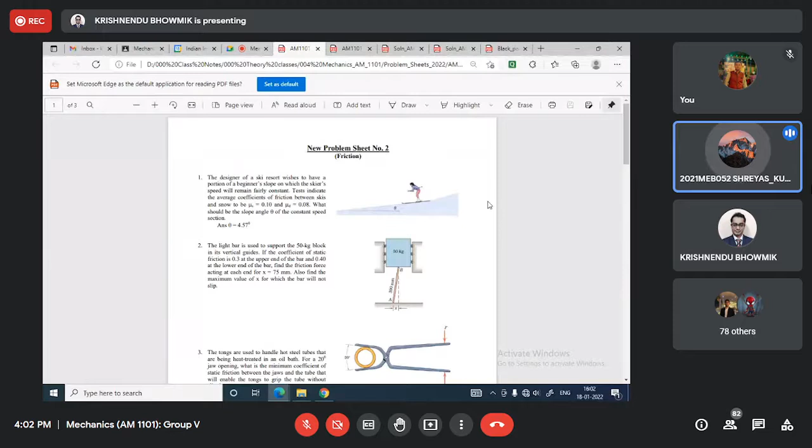Sir, can I make a small suggestion? There is an extension in Google Chrome where you click once and get all the attendance in an Excel sheet, so you can use that, it saves a lot of time. But that will not help me know whether students entered late or before. Actually sir, you can take it in the middle of class so you know everyone is present, and you don't disclose to us when you are taking it.

No, that is the issue. Actually, why I'm doing this, I told you before. A recent incident happened - one teacher took attendance entirely through Google Form, and somehow it got missed. One student was supposed to have almost 100% attendance, but he was not able to appear in the exam because, as per the professor's notifications, he was not at all in the class.

That's why I always prefer to interact with you. Let's take some 5-10 minutes, but at least there will be some interaction. I should not be a robot in taking attendance, that is the main purpose, understood?

Okay sir, don't worry. What else - some students, there will be no interaction with me at all, some students are not like in the aerospace department or mechanical engineering, to whom I can take class in the near future. So if one student is a shy person and not asking any questions, and I'm not taking attendance, that means verbally I never call your name or roll number and you have given an answer, then we are all just like Sophia, a robot.

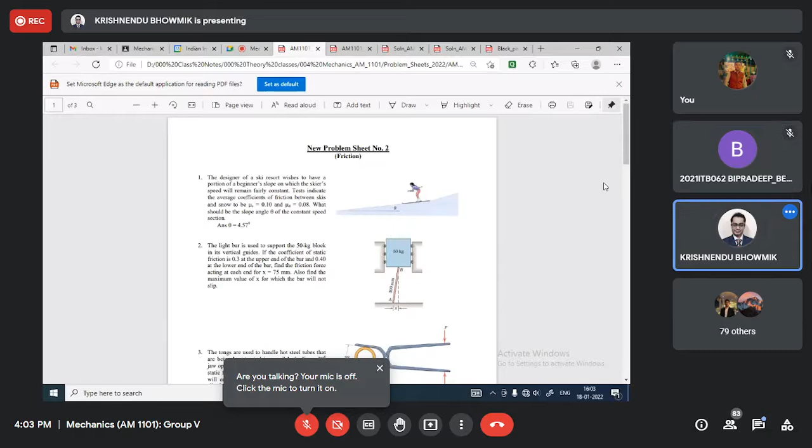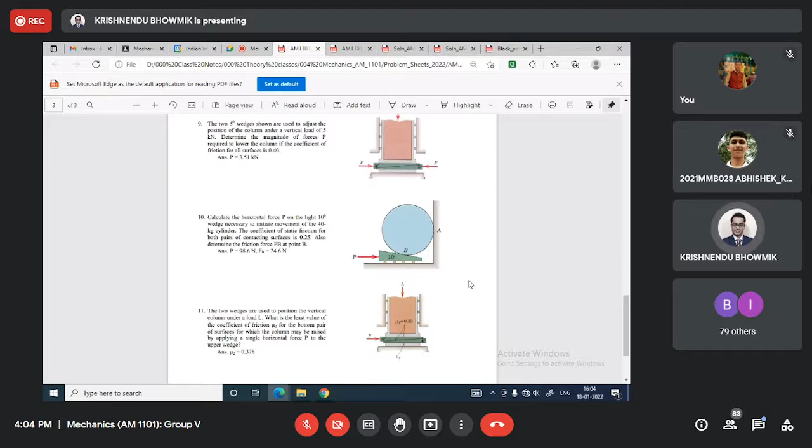Problem 7, problem 10. Have I told about that day or not? Did I tell this before? No, okay no problem. Any other problems? Actually, I will tell you, if you have any problem for friction, you have to tell me now itself, not after. I will see how many problems you are having. If there are many more, I will think not all problems I will solve. Few problems I will solve.

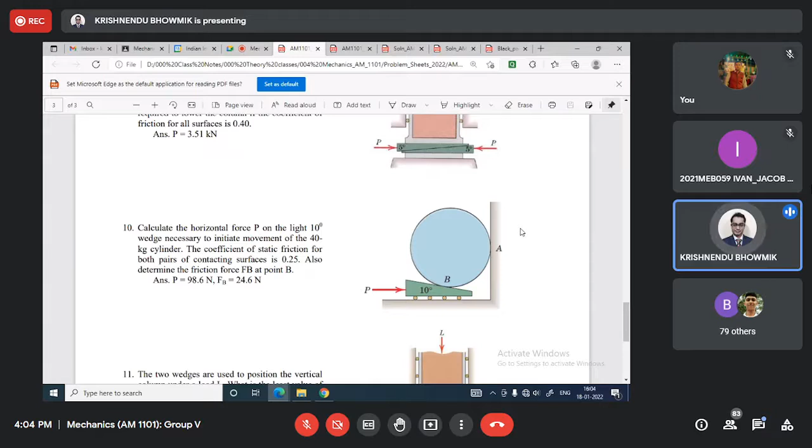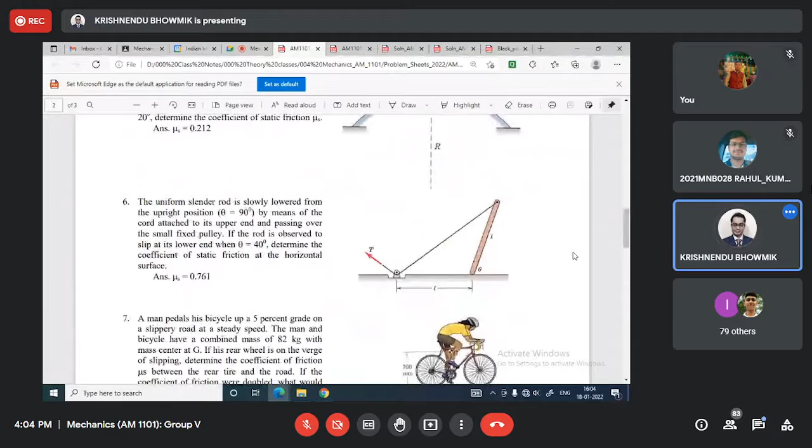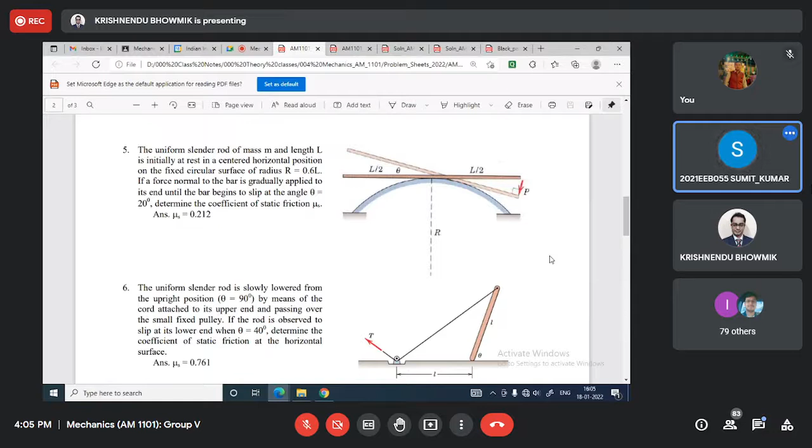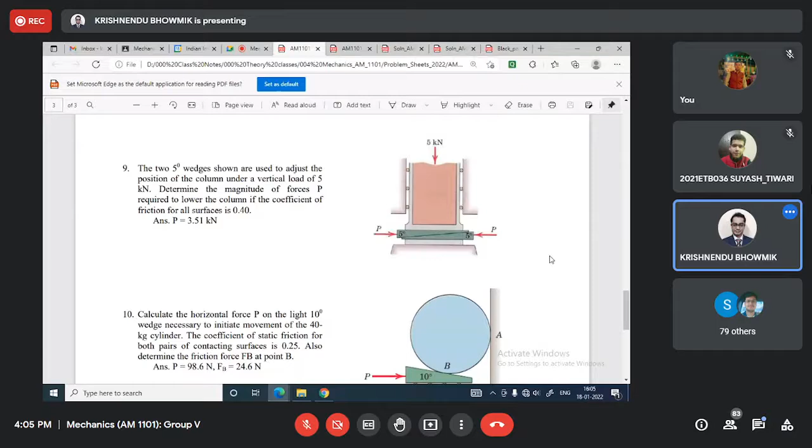One problem, one request I got: problem number 7. Another request, problem 10. Any other problems? You have to tell now itself. Sir, question number 6. Okay, any other problem? Actually sir, I have not completed it, that's why I have no doubt in it. Okay, so problem number 9, sir. Okay, anything else? That's all, correct?

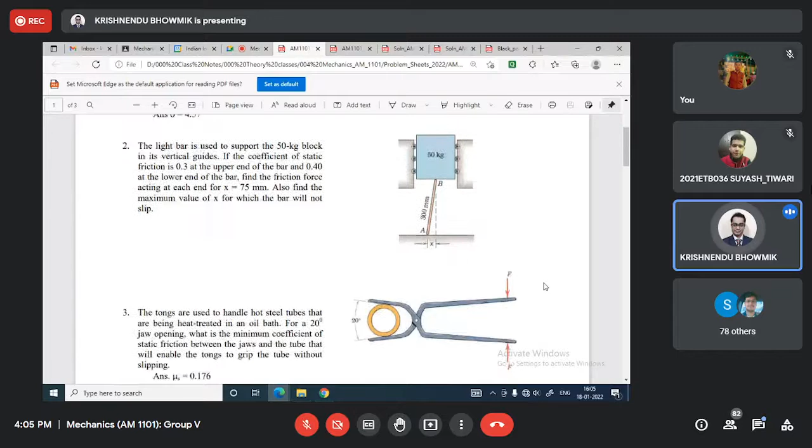If anybody wants to say this, you have to say now itself, because next day I will not give you any hints from this. This is friction, I will not ask next day. Whatever you want to tell, tell now itself. If anybody has any doubt regarding any free body diagram, anything, you can ask me now.

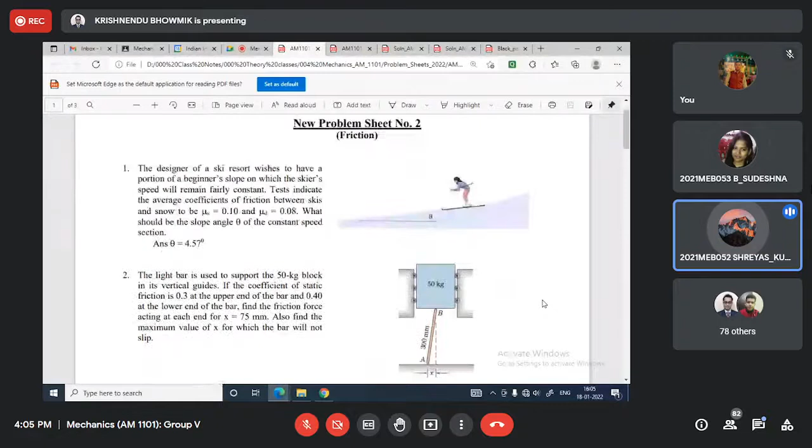Sir, can we keep this for next class because many of us haven't tried the sheet yet? I tell you, last day I showed 2 or 3 problems, now I am showing you 4. 3 plus 4 is 7, remaining 5. So next day, if some students are asking for 5 more problems, what does it mean? You are 10 plus 2 standard, you have qualified, you cracked JEE main, you have come here. Out of 12, am I solving all 12? It is not good, correct?

That's why I'm telling, if anybody is facing any issue, some of your friends have already solved it. You can take help from them, but don't copy their answer script. You can discuss and take help and do it on your own. You understand these problems. Last day maybe I solved 3, today I am solving 4, so 3 plus 4 is 7.

Say for example, next day some students will be asking the remaining 5 problems, that means all 12 problems I am solving here. That is not good. If it continues that way, you will not get any confidence, and when I give any new problems, you will not be able to answer correctly. You will not be able to solve that. Don't memorize the problem, don't just try to memorize everything. Try to understand the concept. Utilize the concept, 100% you will get the results.

Now tell me, one, two, three, four problems - request I got. Any other problems if you have, you can tell me.

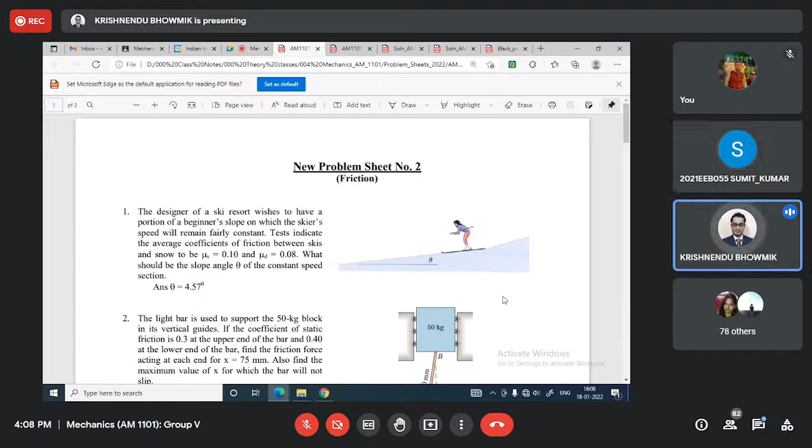No, don't waste time, don't waste time. Not required, only FBDs. That is more than enough because FBD represents everything. Don't worry. Okay sir, I have joined late.

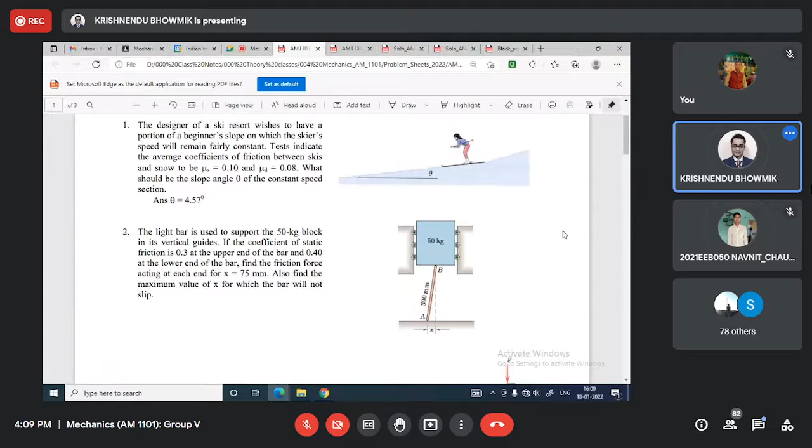Should I continue with these four problems? Yes, sir. Okay, just a minute. Let me check problem 6 first. Which one is 6? This one. Okay, let me check it.

We have a uniform slender rod that is slowly lowered from the upright position. Initially it was like that, theta was 90 degrees, this was theta. Now we are slowly lowering that by means of a cord attached to its upper end here, passing over a small fixed pulley.

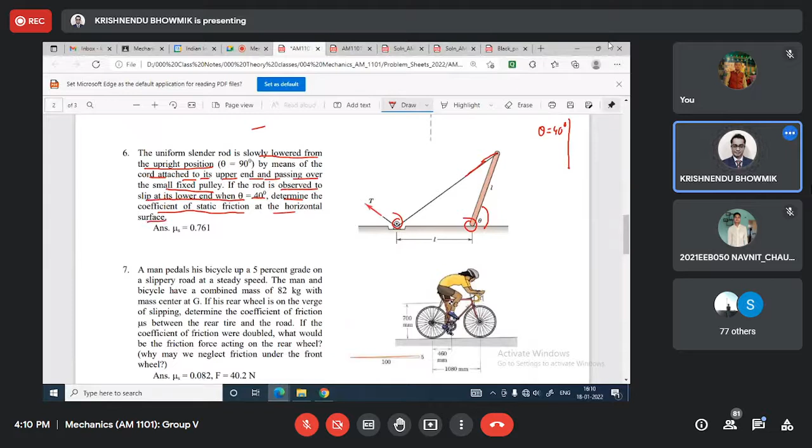The rod is observed to slip at the lower end. Here, slipping will occur at theta equal to 40 degrees. Determine the coefficient of static friction at the horizontal surface. Since this is a pulley, we can consider it frictionless, so the only friction is here.

Now you have to draw the free body diagram. So draw the free body diagram. The imaginary closed boundary is like this. So what are the things we are expecting?

First of all, if theta becomes 40 degrees from 90 degrees, you have reached 40 degrees, but because you are lowering this, if you go further it will start slipping. So try to understand which side it will move, left or right. That's what you have to consider first.

So, this one, will it try to move left or right? Left, sir. Okay, initially it was like this. Now you are lowering this, maybe this. Then will it try to move left or right? Left, sir. That means the friction force will act in this direction.

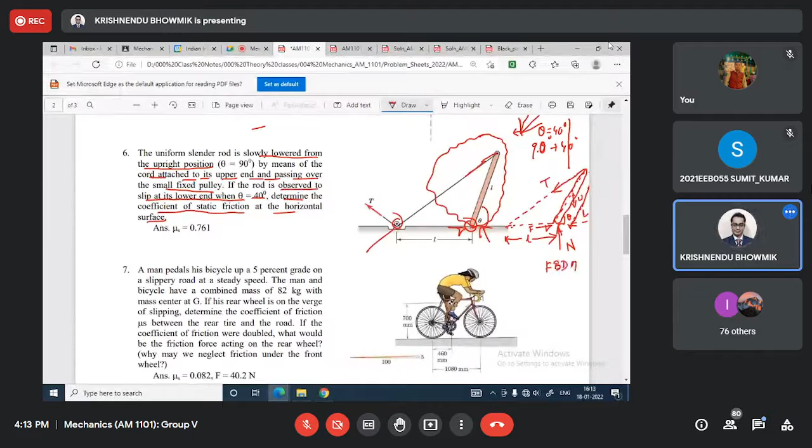Slender rod. Then I will write x-axis here, y-axis here. Okay. Now if this is L, this is L, this also L.

So if it is alpha, this also will be alpha, correct? Yes, sir, if that is alpha, that also will be alpha. If it is 40 degrees, then it is 180 minus 40, correct? Yes, sir. Or maybe 2 alpha equal to theta, is it not? Alpha plus alpha equal to theta, so 2 alpha equal to theta. You can calculate the alpha value.

So alpha you know. Now you draw to understand this free body diagram, so unknowns are okay. Now the question is that it is observed when theta equal to 40 degrees, it will start slipping. That means this F, the friction force F equal to mu S n, has reached the limiting case. F equal to F limiting when theta equal to 40 degrees. Now if somebody wants to calculate the unknowns, that means F equal to mu S n.

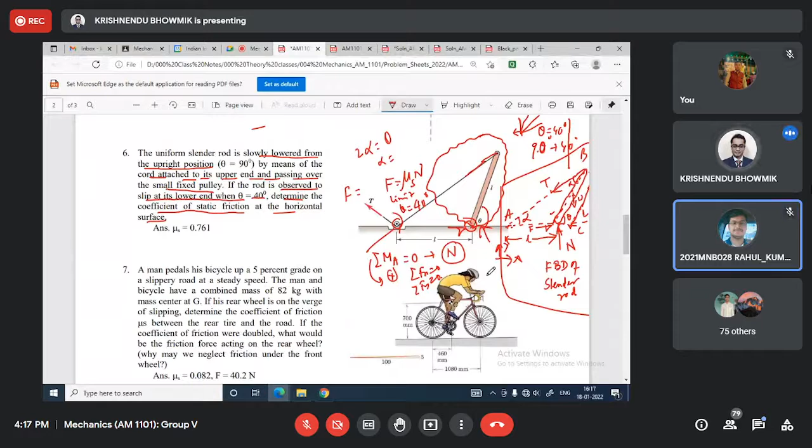Okay, this is done. Any doubts on these questions? No sir. Yes, question 6 is done. Next is 7. Yes, 7 is this one.

Here a man pedals his bicycle up, meaning moving up basically.

The bicycle moves up a 5 percent grade on a slippery road at a steady speed. Steady speed means acceleration is 0.

The man and bicycle have a combined mass of 82 kg, and the mass center is G.

So this is G, the mass center here. This is the mass center G.

If the rear wheel is on the verge of slipping, determine the coefficient of friction mu s between the rear tire and the road. If the coefficient of friction were doubled, what should be the friction force acting on the rear wheel?

Why may we neglect friction on the front wheel? This is the total question.

Now the idea is you have to draw the free body diagram carefully for these problems. To draw the free body diagram, you can see here this is 5, this is 100.

So 5 by 100, if the angle is alpha here, then tan alpha equals 5 by 100. Now I am going to draw this free body diagram.

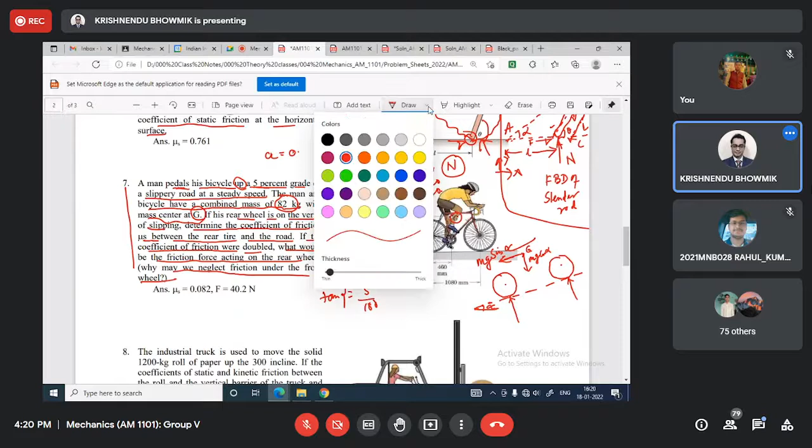Now, as it is moving up, okay, it is at steady speed.

Okay, it is moving with steady speed. Here mg is for 82 kg.

Sir, 82g, sorry, multiplied. Thank you. In Newtons. So okay, what else is there? Let me check, nothing.

The total weight has been given. Let me draw the distances now.

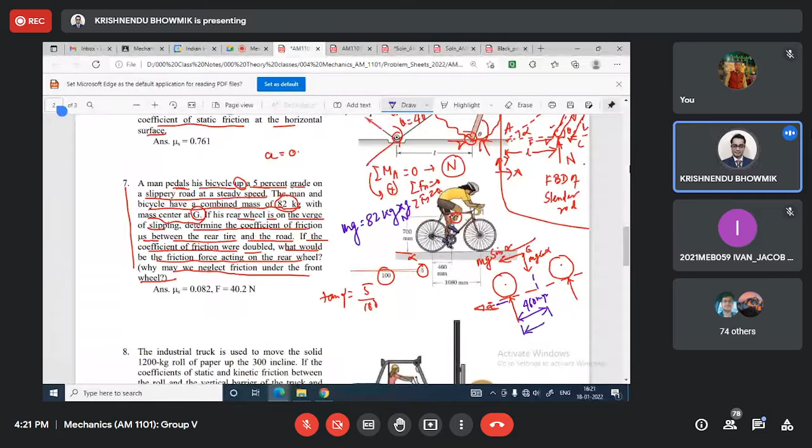This is 460 millimeters, this is 1080 millimeters.

This distance is given as 700 millimeters.

So maybe this is the x direction, this is the y direction. Now basically this is maybe N1 normal reaction, then this is N2. So N1, N2, two reaction forces.

Here is self weight mg, three unknowns. Okay, now the friction force, which direction is the friction force supposed to act?

Right, upward sir. Yes, because that friction force is helping it move up, moving up. Very good. Now maybe friction force F1.

Now if you see carefully, this N1 and N2 - if somebody calculates N1 and N2, N1 is higher than N2.

Sir, friction will be on both tires, right? I'll tell you, if I take friction on both sides, it will become indeterminate, you cannot calculate it.

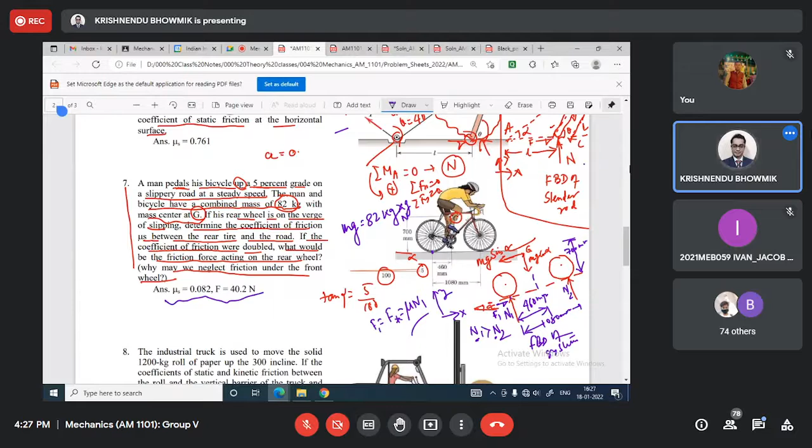Okay, very old solutions, don't worry. So this is the free body diagram, so this is friction, this and this. So here the notation is, say this is A, this point is B, and this is G given.

And dimensions are given, X, Y you have considered, and 5 by 100 inclination is theta or alpha, theta equal to 2.86 degrees. You can calculate. We have 1, 2, 3.

Actually these are dependent, 1, 2, 3. If I consider another friction here, it will be an indeterminate problem, a redundant problem. So we are not considering friction here. Another reason is it has already started slipping because N1 is greater than N2.

I'll show you. So to solve this problem, say if I take moment with respect to this point A, then I can calculate N1, because in your problem mass is given as 82 kg.

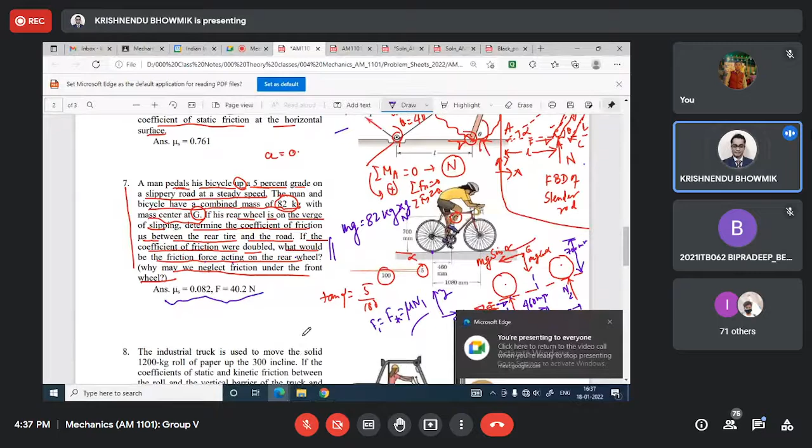Next was, this is 7, correct? 9, this one is yes. Okay, there 9, then 10. Okay, fine, 2 problems more.

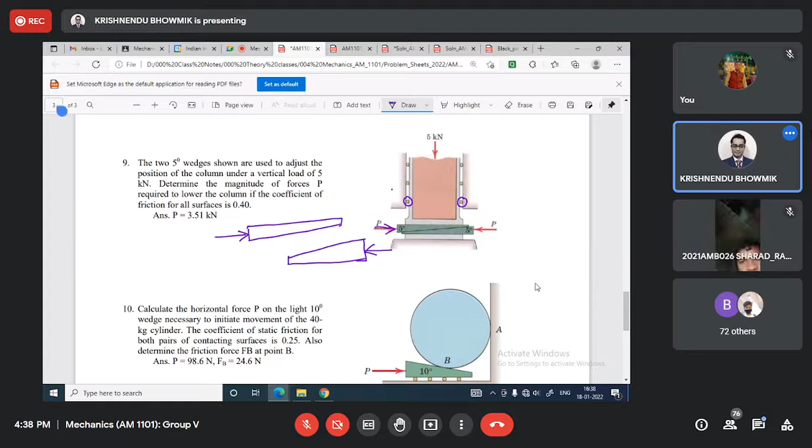Okay, so we have 2 wedges. Sorry, 2 wedges, like one is like this, one is like this. Okay, I have done this. Then some force has been applied from there. So one question is, if you apply force here, like this and this, which case, left case 1, case 2, left, right, which portions will be in contact? Left or right? Roller, right, right portion, right due to one, this, yes, yes, due to the roller, yes, yes, correct. Friction can be neglected from the roller. Friction can be neglected from the roller.

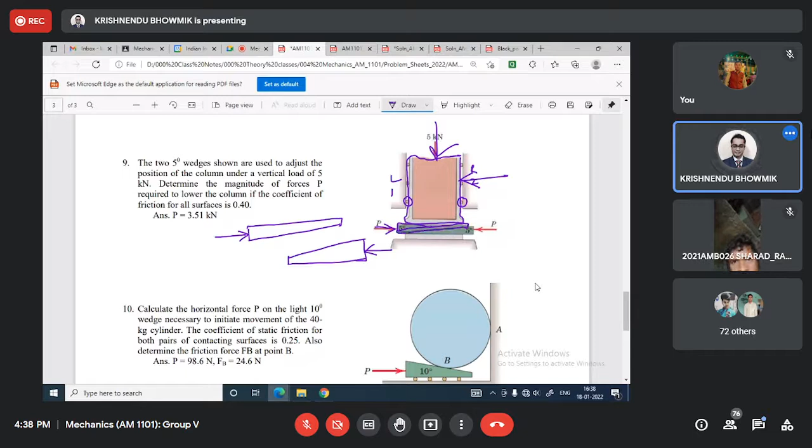So one case is, say, I can have, I'm drawing here itself because to save some time. I'll show you the solution again. So first free body diagram is like this. Entire things I am considering, okay? Only these upper portions. Then this is the vertical one, this is the normal one, sorry, this is the normal one. So there will be some reaction force, normal reaction, and coefficient of friction, it will be here, left side or right side.

Friction force, you are not understanding. Here, let me draw like this. Right side, yes. Right to left or left to right? Right to left. Okay, this.

So that free body diagram, if you draw, then you can get some relationship from the top one. From the bottom one also you can get some relationship. But if we apply P in this direction, this 5 kN block will try to move in the upward direction.

But in this problem it is given: determine the magnitude of force required to lower the column, if the coefficient of friction in all cases is 0.4. That means if we want to lower down this column, then the force has to be applied in the reverse direction. Then only you will be able to lower it down.

So two problems have been marked here: one is to lift it up, and one is to keep it down. Although the figure has been given, if you work accordingly, it will try to keep it moving upward. If you make P in the reverse direction, as I told, initially it was given this way, it will lift up. To use this, it will lower down, it will move down.

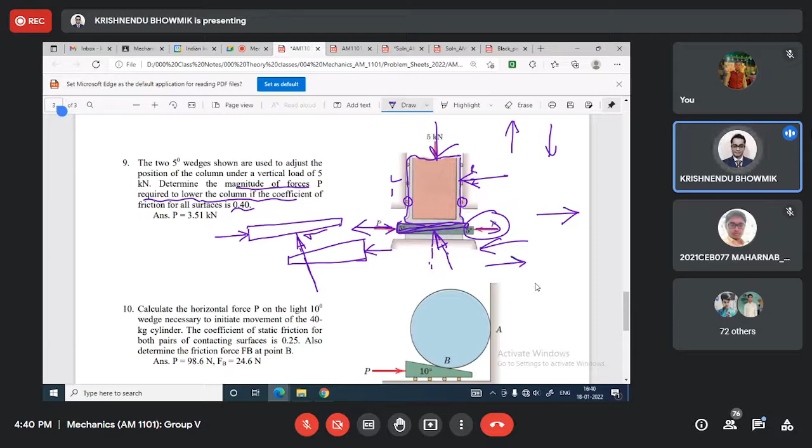So to get the solution, what we can do? What is the problem number? It is 9, correct? Okay.

So as I told, for the left side one, as a whole, I want to draw this entire thing. This is the reaction force, say R4. This is the self weight, 5 kilonewton. This is P, initially given P.

Basically here, try to understand: this is the normal direction, and this is the friction direction, normal direction reaction and friction. As a whole, it will have some resultant here. This is the resultant, I want to represent the resultant by R2. So this is the resultant, and this resultant will make an angle phi with the normal. Phi is the friction angle. So this is the normal, and this is phi.

And this is 5 degrees. So this is 5 degrees.

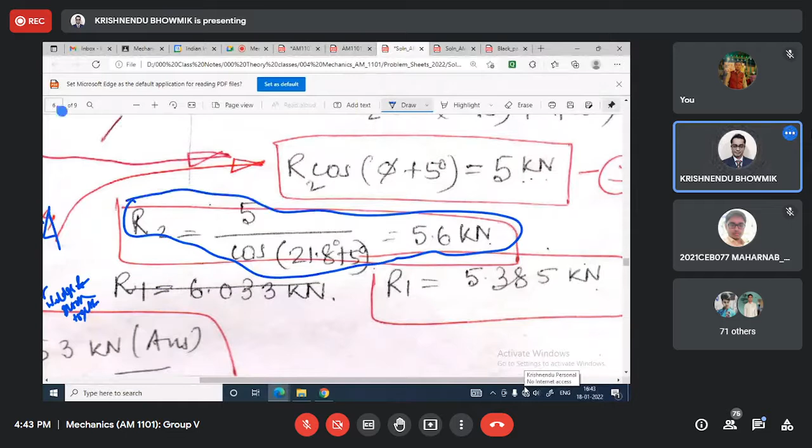R2 equal to, you can calculate, let me see, some value you can get: 5.6 kilonewton. This R2 you can calculate first from the free body diagram of this one.

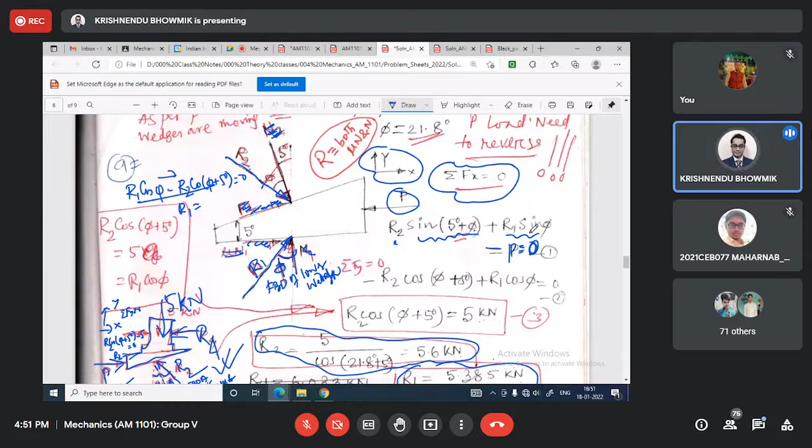Then come back to the free body diagram of these portions, so that R2 will be there. In the vertical direction, R2 cosine of 5 degree plus phi will be here, R1 cosine phi, vertical direction. In the horizontal direction, that is R2 sine of 5 degree plus phi, plus R1 sine phi, minus P equal to 0. You solve this, you will get R1, R2 and P values. This is case 1.

But you have to be careful what we are assuming: that both faces here and here we are using phi. Why are we using phi? You should write here: our assumption is that limiting friction will be reached at both the upper surface and lower surface of the lower block. That is the assumption we are doing. That's why we are utilizing this phi. Unless we do this, we cannot solve this problem, it will be indeterminate.

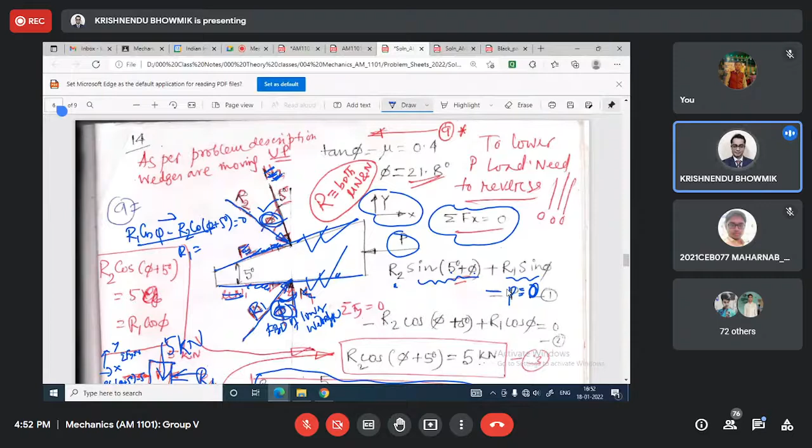So we are considering that for the lower wedge, both the upper surface and lower surface have reached the limiting friction case. That is the first assumption, I forgot to mention it initially. That's why this phi and this phi are valid for the expressions. Based on that, you can get this P value to lift it up. Then to lift it down, what do you have to consider? You have to reverse the direction of the force. If you do that, accordingly R1 and the friction force will start acting in the opposite direction.

Initially for this case it was right side directions, left to right, now it becomes right to left. It was inclined left to right, now it becomes inclined right to left. That's why this R2 and R1 direction has changed. What is R1 and R2? That is nothing but the resultant between the normal force and the friction force.

Now, very nicely you have to notice this R2 is making angle with the vertical, that is 21.8 degree minus 5 degree. Here it remains 5. Okay, summation Fy equal to 0, summation Fx equal to 0, solve it and you will get the correct answer.

Any doubt for this? Yeah students, any doubt? No sir. Okay, yes, then I can move to the last problem, 10. Which one is 10? Yes, let me check.

So calculate the horizontal force P on the light 10-degree wedge. Light means massless, this wedge. Necessary to initiate movement. It is trying to do the movement of the 40 kg cylinder, this 40 kg cylinder, huge weight compared with this wooden block, that's why we can neglect this.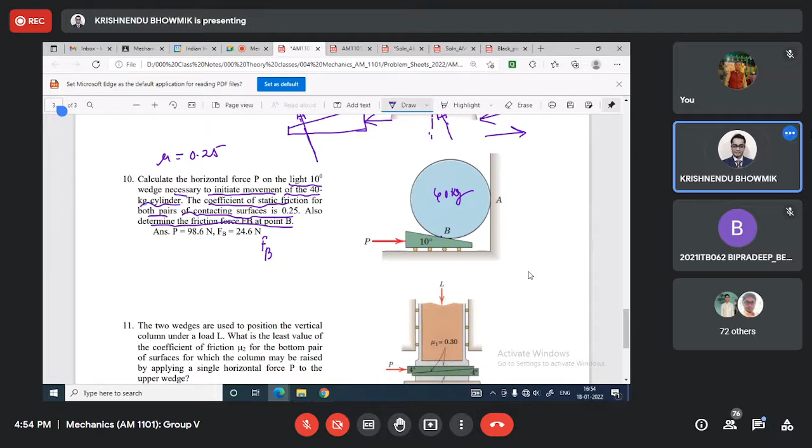So to solve this, one thing we can assume that there are two. If you draw a free body diagram of this, one is its self weight, let it be, one is its reaction force here, and during this contact, this is the normal, say NB, NA, this is mg. So I have not considered friction yet, I will consider here, wait.

Then for this case, see this is roller, we will not consider any friction there. Let it be only this. Then this is weightless, then this is the normal reactions NB, okay, this is P, this is say N AB, let's see NC. Okay, now friction force.

Here I have not considered the friction force. If I move these directions, this is the driving force. So here friction will be upward or downward along the incline? Downward? This one we are trying to move this, will it help you or resist it? Resist.

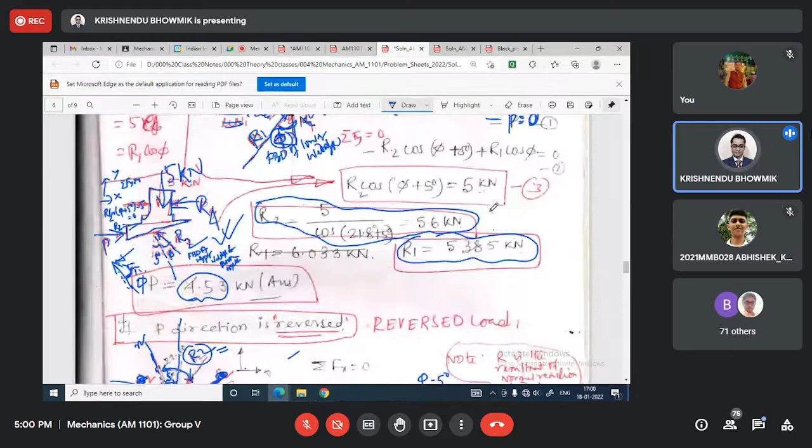FA equal to FB equal to this value. Okay, let's show you the solutions. This is 10, correct? Let me check. What is this? 9. Yes.

Okay, NB. So we can get FB equal to FA equal to mu Na. For FB I cannot use mu NB. This is A, okay, so FA equal to this is valid.

Now there are two free body diagrams here. This is one free body diagram, this is another, the free body diagram of this cylinder. FBD of wedge, FBD of cylinder. Do it carefully and you will get some relationship, like summation Fx equal to 0 will give some relationship, from which you can get some N1 value, some N2 value.

You can take this value also to get P, and solve it. Finally you will get P value as 98.6 newton. Now we will check whether you are correct or not.

So FB equal to mu NB. Actually it is B, okay. This is A, I think this is B. So this is zero. Mu is how much it is told? 0.25 multiplied by NB. Let me check A and B.

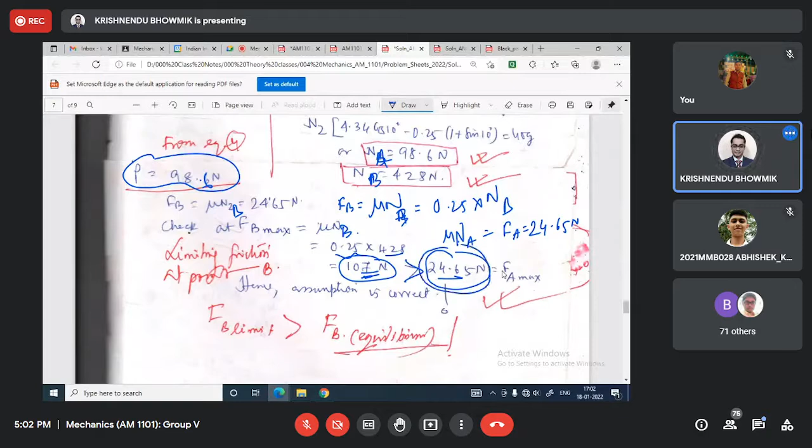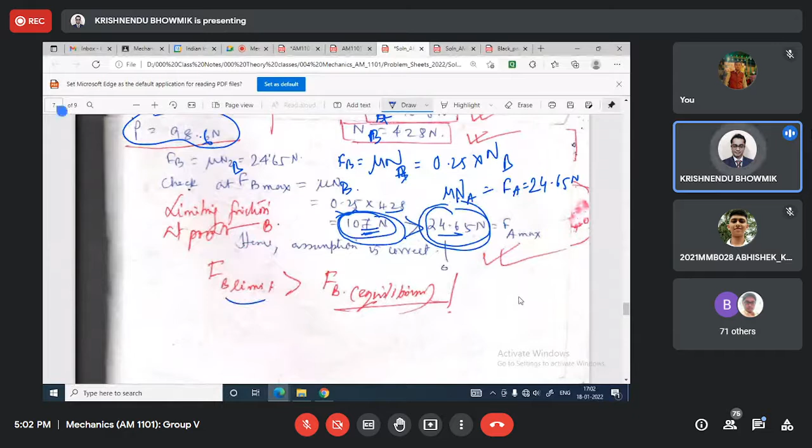That's why even if it starts slipping at A, B will not slip at point B, at the contact between this and this. So the B limit is higher than the equilibrium requirement. Hence our assumption is correct.

So you have to show this, show that the initial assumption is correct. If you are not showing this, then your answer is not correct, because it may happen that whatever you assumed is wrong, and then you have to consider the reverse — instead of slipping at A, it will start at B. But you have to be careful. When you have 4 or 5 surfaces in contact, you may reach wrong solutions. So try to understand some basics of mechanics to assume at which location the slipping is supposed to start.

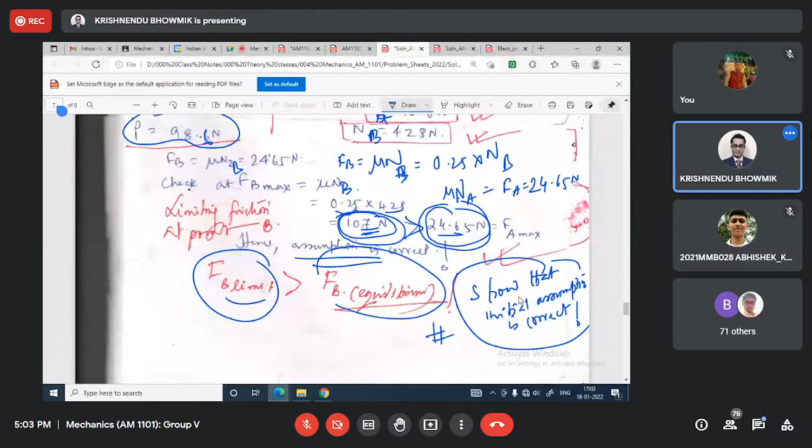Any problem up to this? No, sir. Okay, let me close this friction topic — no help, nothing more for the frictions.

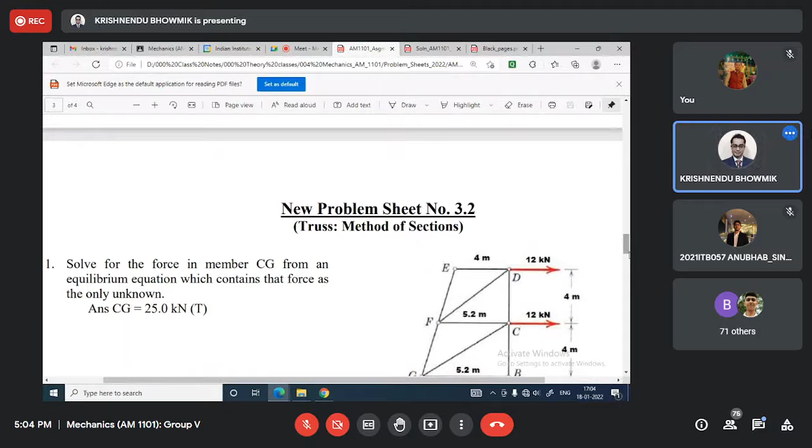Now for the truss problems, can you tell me some problems you are facing issues with? Let me write down whether I can solve them, I don't know, but at least I can note them down. Tell me, from 3.1, which one are you getting issues with?

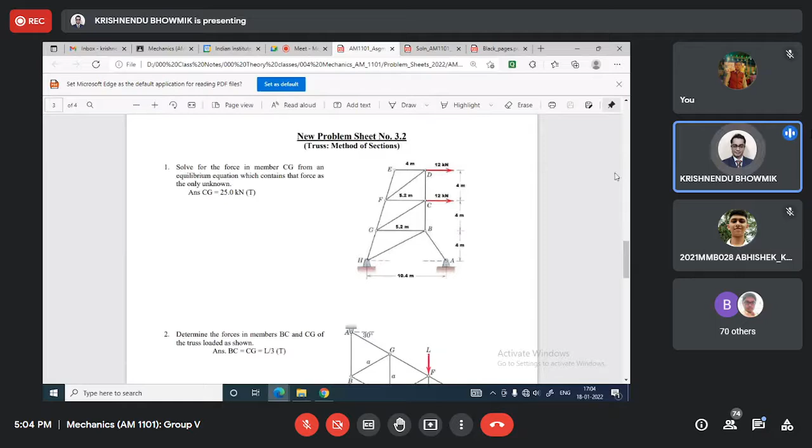One I have solved, correct? 3.1 and 3.2 — 3.1, this one I solved that day. And this also I have solved. 5 also I solved. Then this one, 3.21, I have solved. So 3 problems I have solved out of 14. Now tell me which one you need help with.

Or if you haven't had time till now, roughly tell me two problems I can solve — one from joints, the other from method of sections. You tell me. Next day also we'll do more, don't worry. So that day I showed you these problems.

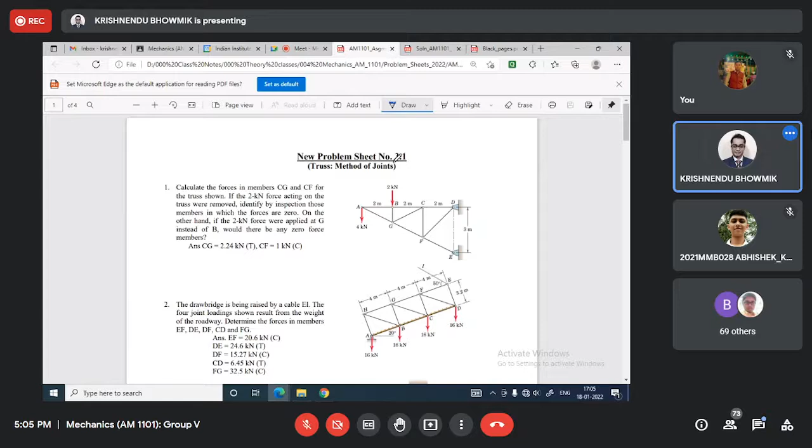On that day, these problems — wait, this one and this one, these two I have shown. Then I showed this one. These 3 problems. Now tell me any one problem from 3.1, any problem from 3.2.

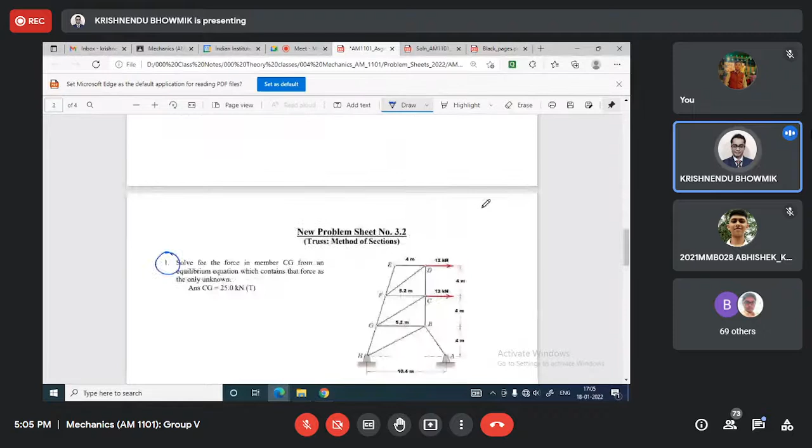Don't worry, next day also we'll continue this. 7, yeah 3.7, this one. Yes sir. Okay, 3.17. 3.17, okay. So 3.25, yes, 3.2 — this one, correct? Yes sir. Okay, 3.25, very good.

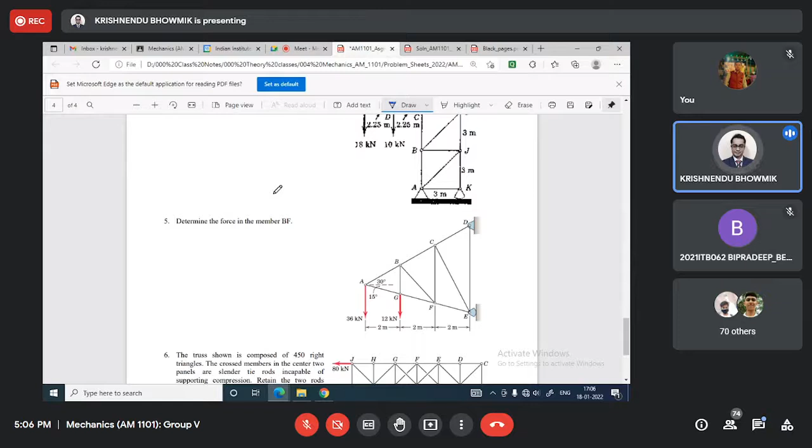So this is the tower for a transmission line. In electrical engineering you have seen this many times. It is modeled by the truss as shown in the figure. The cross member, there is some cross member here, this way the cross member, here one set, here one, here one.

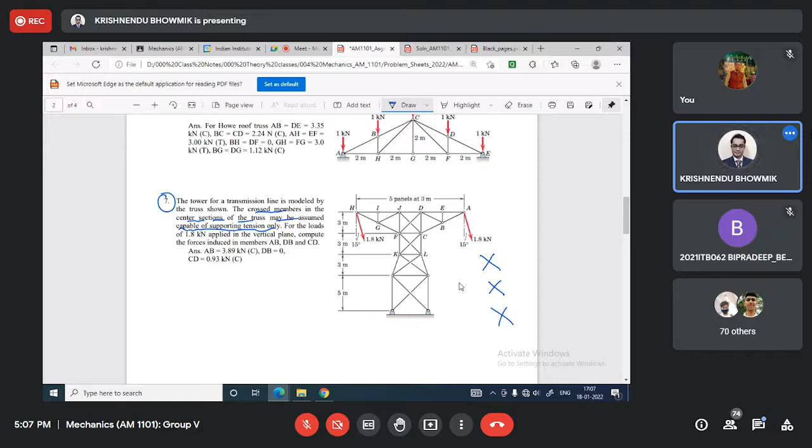The cross members in the center sections of the truss may be assumed capable of supporting tension only, so it will take only tension load, that is being told. So out of these two pair, only one member will take the load.

Why this assumption? If it is not given, we cannot determine this. It will be indeterminate. We cannot determine the unknown.

Next, for the loads of 1.8 kilonewton load applied in the vertical plane. This vertical plane means, you try to understand, this is X, this is Y, so this is Z, Z is perpendicular. This vertical plane means it is in the XY plane. So that means this vertical plane is indicating it is in the XY plane.

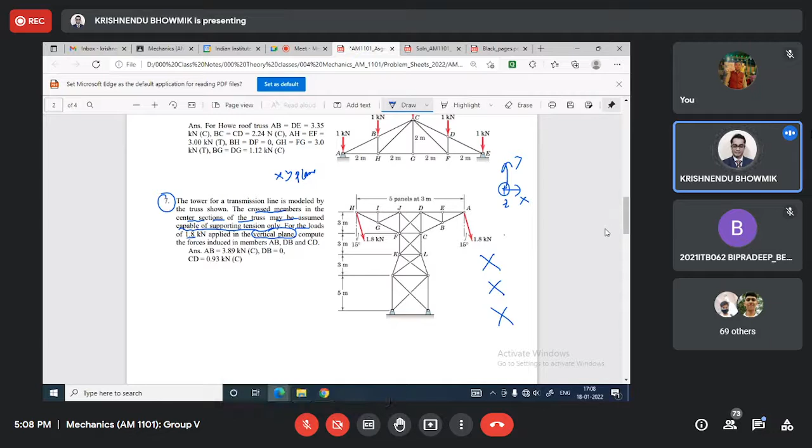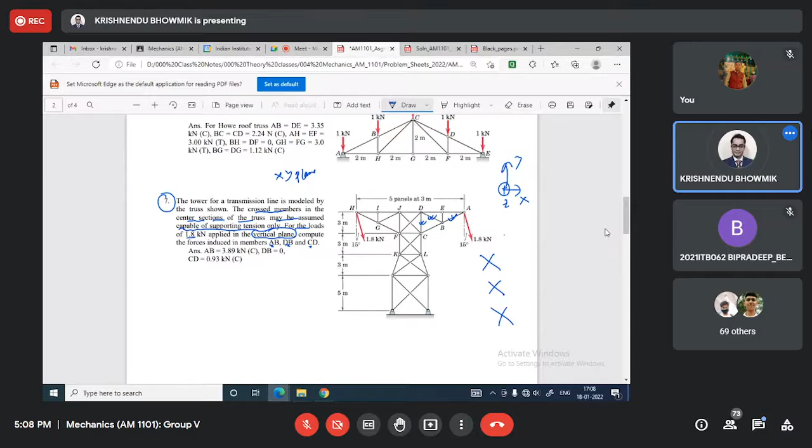Now compute the force induced in members AB, BD, CD. Which is AB? This member, then DB, this member, then CD, this member.

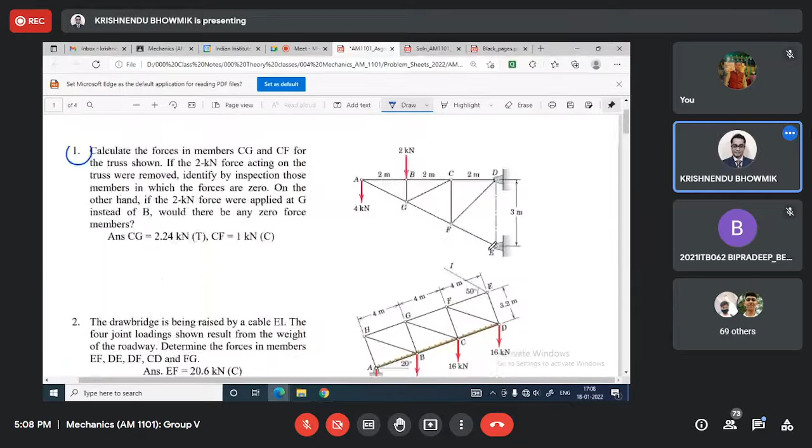Now you try to understand this problem. When load has not been applied, this is symmetric, is it not? When no load has been applied, it is symmetric. Which method is it? Let me check - method of joint. When no load has been applied, it is symmetric.

But the load is applied not in a symmetric way because it is having some inclination here. So symmetricity will be lost after the application of this 1.8 kilonewton load at some angle with the vertical, by 15 degrees. But initially the geometry was symmetric. It is very common, no?

You have seen many high tension wire connections of this type. Electrical engineers might be interested in that.

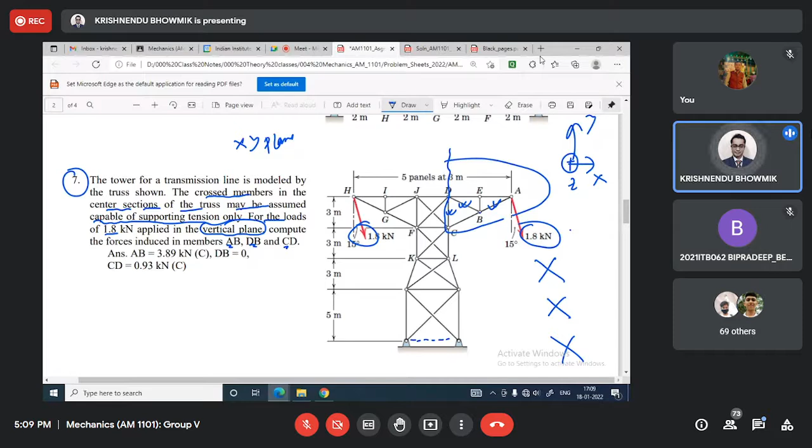So for this, as everything is shown on this side only, you can see this is not the complete truss - this member is missing. So internally it is not stable. But using two supports plus four supports, it is made stable. Because generally if we could have a triangular shape, any three supports are enough, correct? Here two supports, two reactions, here one reaction - you can see here it is a hinge. Extra support we have provided because externally we made this structure stable due to lack of this member.

Now don't worry, we don't need to take any reaction force, not required. Very careful observation for joint E. Joint E has members EA, ED, and EB. FBD of joint E: it will say in X and Y directions, summation Fy equal to 0 will ensure the EB value. EB value is 0 - that one you get first.

Then you draw the free body diagram of joint A. This is AB, AE, and this is the 1.8 kilonewton load, with angle theta equal to 15 degrees. FBD of joint A - as the method of joints says, all forces are passing through point A, it is concurrent, so the moment equilibrium equation is already satisfied.

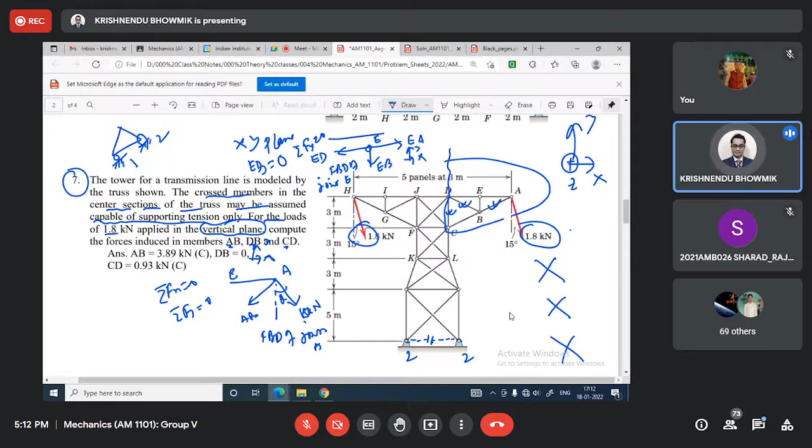Once AB is done, you draw the free body diagram of joint B - this is B, with members BC, AB, and BD. This one is already 0, correct, and this one is known. So you can calculate these unknowns.

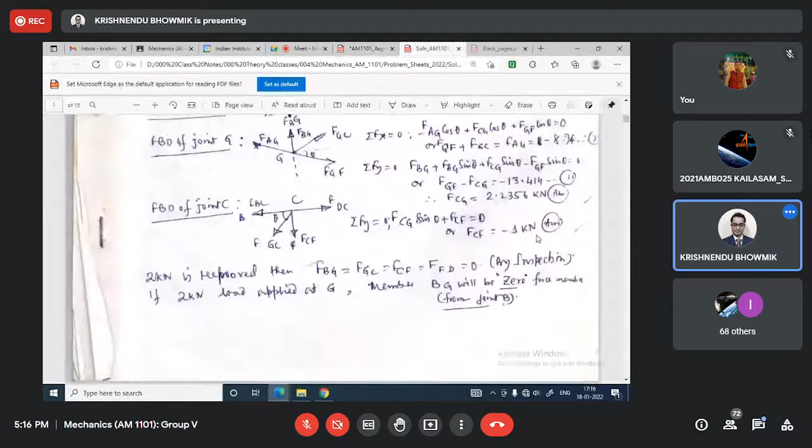Okay, let me see. Time is short, I can show you the solution for this. 3.1, we can have some inequality expressions for this.

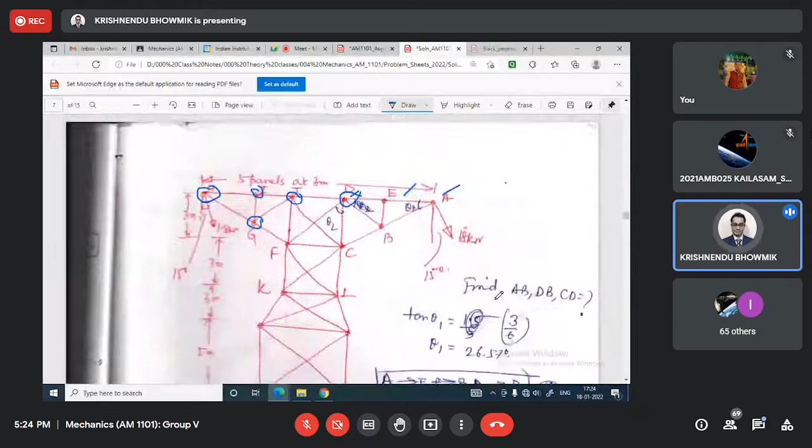What is the way I am showing you? This will be very lengthy, it is taking much time, but somebody can go step by step. Finally there will be some inequality expressions for this one and for this one. Considering DF as tensile, minimum value we can get, and considering CJ as tensile, minimum value we can get. Considering both as tensile, inequality will say that DJ is less than this and DJ is less than this.

Which one should I take? Less than this is less than, this is also less than equal to expression. So then we can consider some lower value of DJ. Then corresponding DF we can calculate, so remaining thing CD we can calculate accordingly. You follow this, and if you are facing any issue, next day we can see.

Another approach we can do: initially we can think that this is tensile, this is compressive, and solve it, and try to get the answer. Hopefully you will get this answer in that way. Understood?

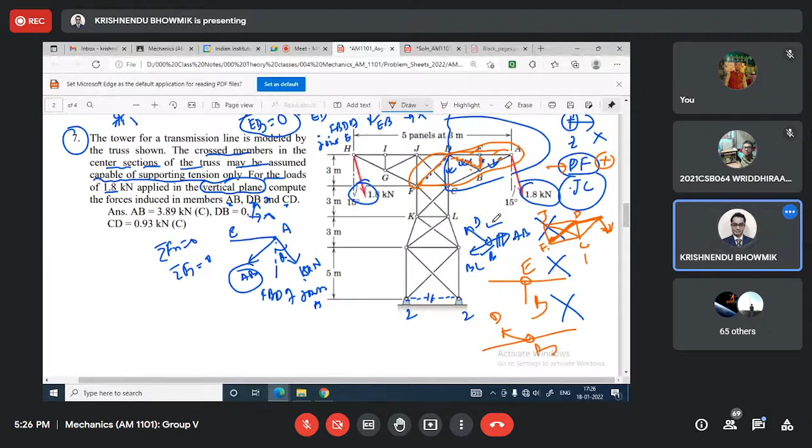If it is very lengthy, I will not provide you this in the class test or midterm, because in 15 minutes nobody can do this problem, it's not possible. It is not possible for students to do this. If it is only one member, in a single shot you can do it, then it is fine.

But as I told, both approaches you can try, whatever you are convenient with, and let's see how much results you are getting. As it is an assignment, you have enough time, that is my assumption, you have to do it and you can submit. But in the exam, generally I will not provide you this type of lengthy problem.

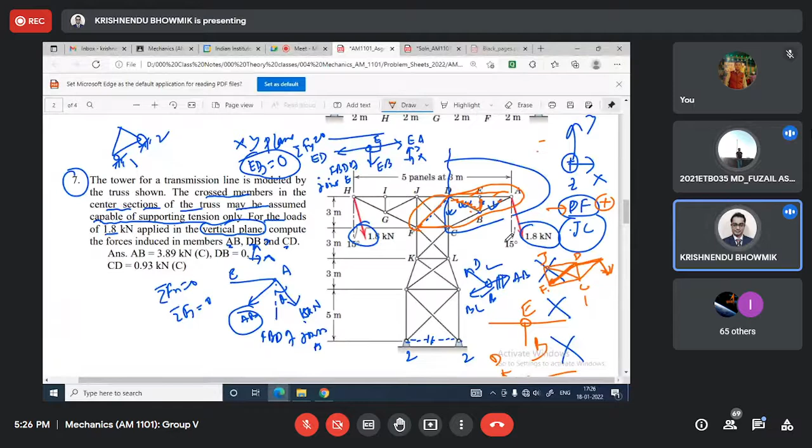Okay, last problem. Now last problem was 3.25. Okay, fine. So see, this is a triangular shape.

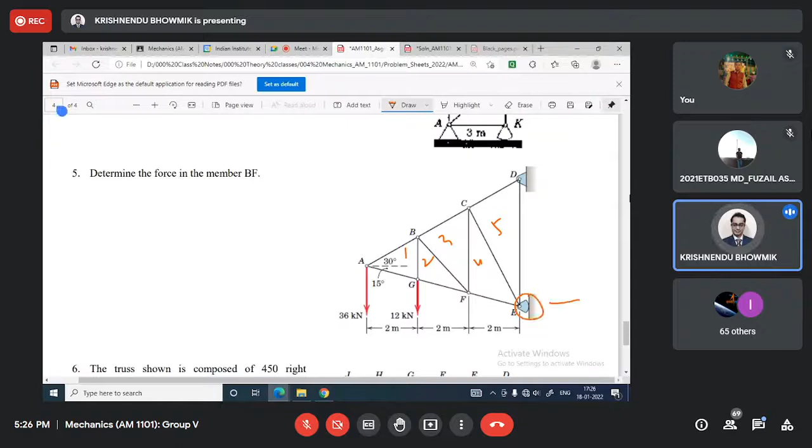Please stop now, sir, we are feeling exhausted now. Only 1 minute I will take. This is one member, all triangular shape. This is basically roller, and this is basically hinge. Okay, so 5.

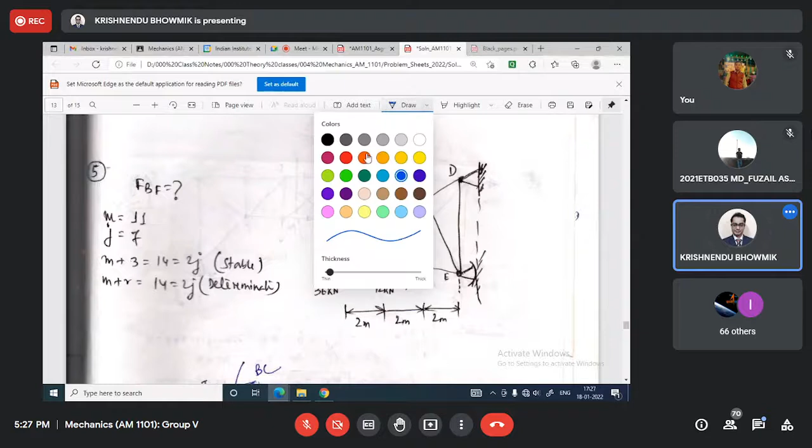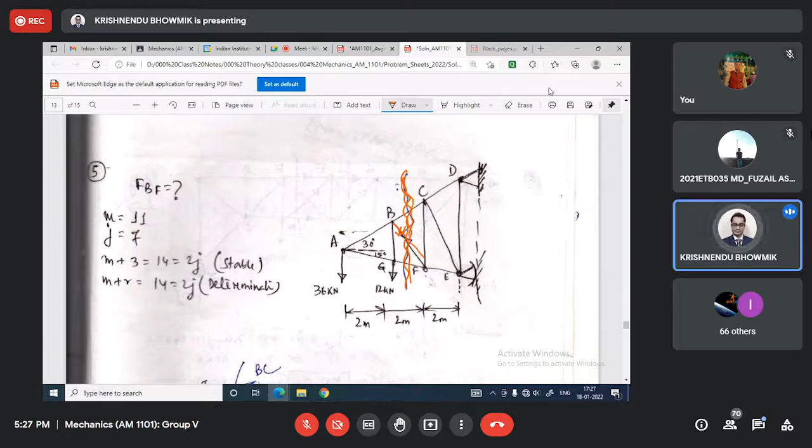Okay, to solve this, what we can do? We'll take this as the cutout. What we have to calculate? We have to calculate for this problem, calculate BF, so this force we have to calculate. This is the imaginary cutout. You will take imaginary cutout and take any portion, and this has been exposed here, force, this force has been exposed.

You can see the angles. This is one point, it is pointing towards this point. Now if you take moment with respect to this A point, that means this is passing only through BF, that directly you can say. Take moment with respect to A, this equal to 0, and only unknown is BF. Directly you can get it, only thing is you have to be careful to calculate the moment arm and all the calculations to get BF.

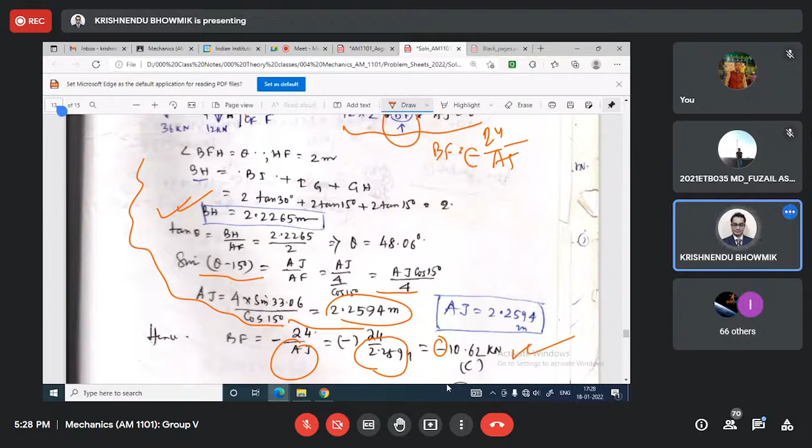So BF is nothing but BF equal to 24 by AJ. But what is the value of AJ? To get this, you have to follow some geometric calculations, and AJ will get 2.2594, then 24 by this, along with a minus sign, it will be, you can say it is compressive. So that force you can calculate. That's all, today I can stop here.